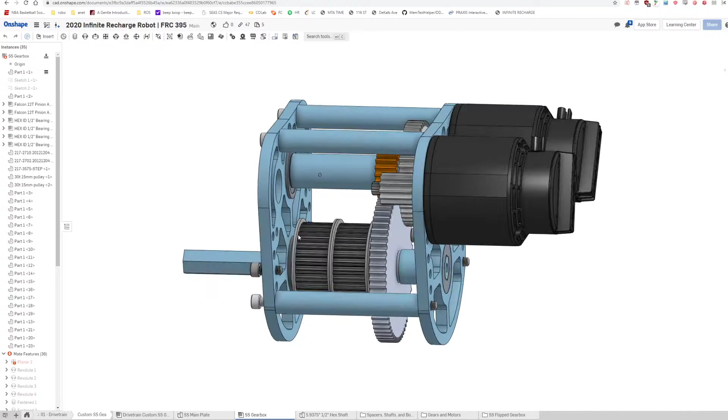Last night, and I woke up today and I sort of just banged out the rest of this CAD. I'm sure it's no surprise to you guys that it's much easier to work CAD without speaking to a microphone. But it is a lot easier.

Yeah, there's not much added. There are these plates, there are these spacers. I'm not really sure where I left off at, but I think it's a pretty logical progression.

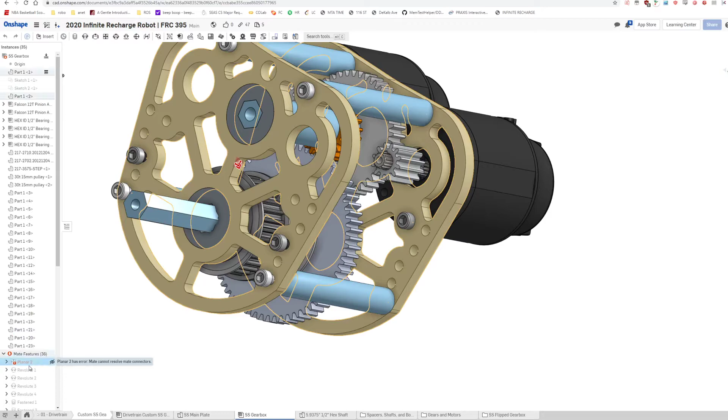These six holes are supposed to be threaded, and something I don't get... mate cannot resolve mate connectors. Weird, just noticed. The things throwing the errors are also...

Okay, well, I'll ignore the errors for now. Sorry, got sidetracked a little bit. So you should fix all that later.

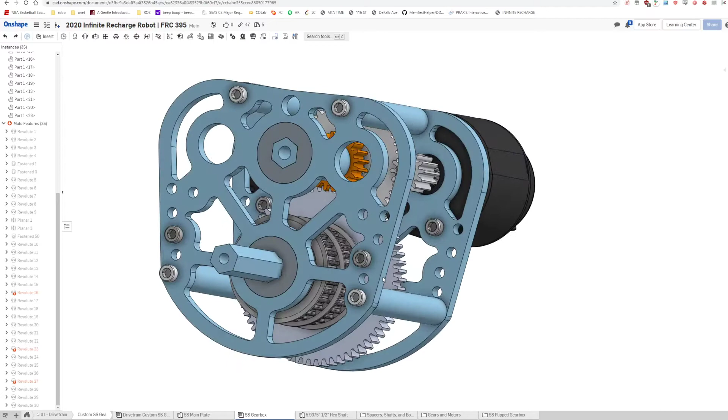But right now, the biggest changes are that I have added in these spacers, I've inserted the hex shafts, and there are appropriately dimensioned hex shaft spacers everywhere.

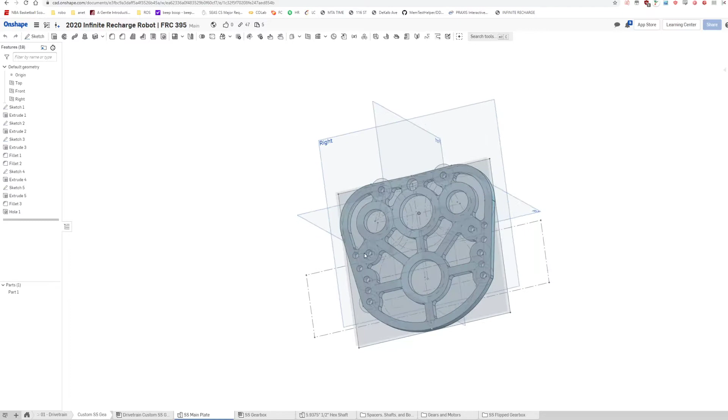That's mostly it. On the main plate, you'll see I tried to do this thing in OnShape where I tried to tap these 10 holes for a quarter-20. Maybe I did something wrong, but they do not show up as tapped.

But you can go back to the assembly and you can sort of see how I'm planning on this working, where one side isn't tapped, but it avoids using a nut on the back end. So these two holes aren't tapped, but these two are tapped.

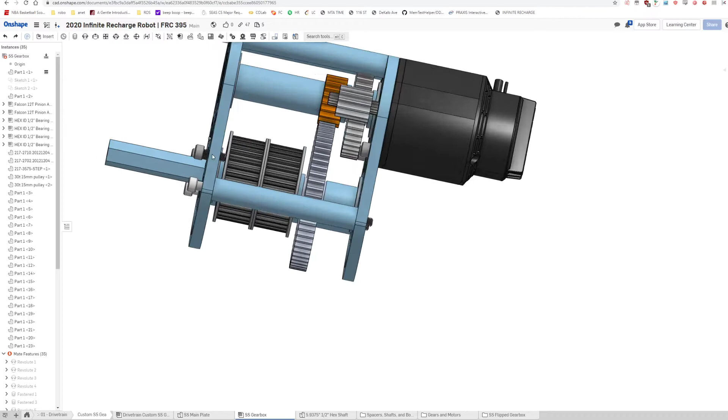So it screws into the tubing, straight into the plate here. These two, this hole and this hole, aren't tapped, and this hole and this hole are tapped. So it screws in like that. Motor holes aren't tapped obviously because of the pattern, and that's it.

It's six holes. I think it all makes sense. All works out. What else did I have to say?

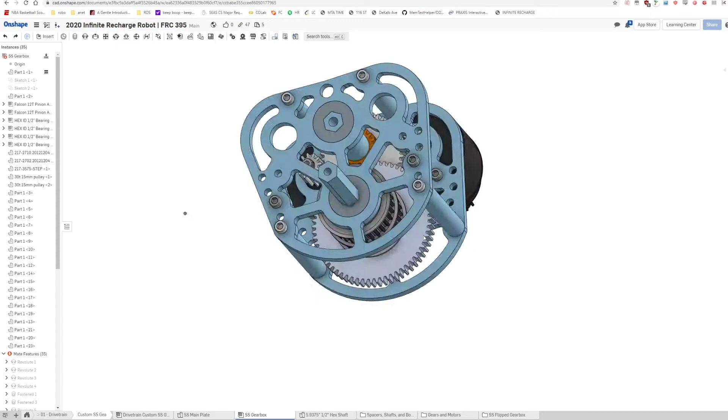So these two pulleys, I don't think this squishing is correct. I think there is more spacing between there, but it's as simple as just reducing the size of this spacer. There's still room for me to walk this way on this gear, so reducing the size of the spacer gives these pulleys more room to breathe.

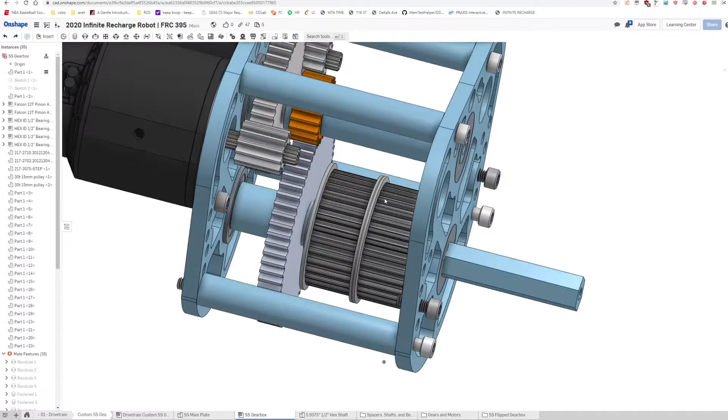That should be fine. Whether or not they should be smack together like that instead of having a 0.1 inch shim in between them, I don't know, but they seem to have been running fine on our drivetrain this year. Last year we didn't stack pulleys like that, but this year we've been stacking pulleys, and maybe the 4 or 5 hours of practice we've had has seemed to run fine.

Maybe it's been a source of issues, I don't know if it does turn out to be a source of issues. Again, we do have some room here to walk the gear back, and it's not a super big deal for the protrusion on this gear to be touching the protrusion on this pulley.

We could actually move this spacer out here. I think that's like the only... this is like the only... it was a very simple assembly, so to speak.

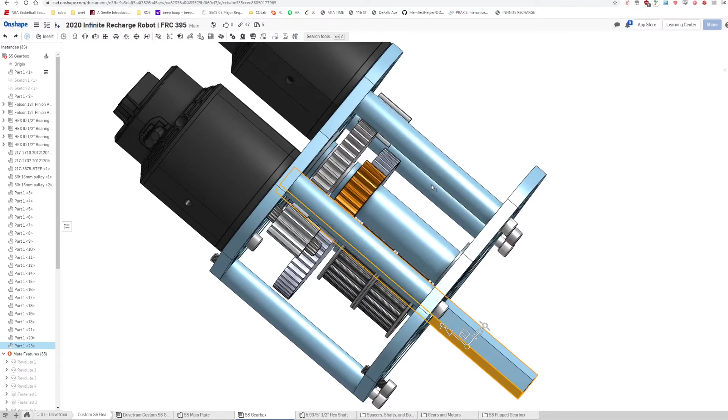Hex shafts, they're all the right size, I'm pretty sure. The nice thing is there's no need for collars or anything. It's pretty cool because if you just make spacers to the right lengths, you constrain the shaft in between the two flanges of the bearings.

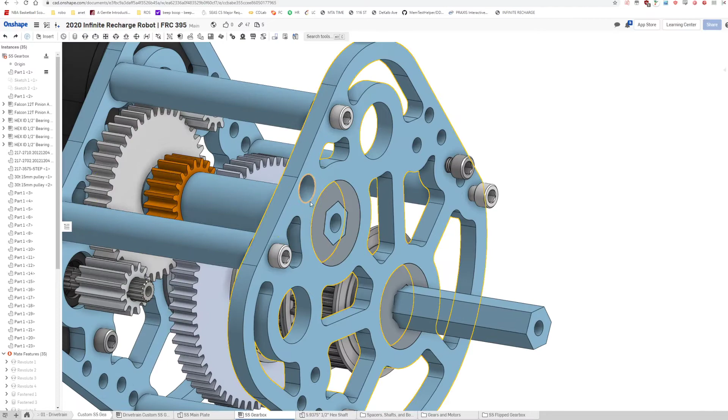Yeah, constrain the shaft. But you do still need to put like a bolt and a washer there, or like an E-clip. This is actually a problem, I think we might have to address that. I don't know how, because I don't know how you get a bolt and a washer there. Maybe I'll fix that off screen.

That's not tenable, you can't do that. Maybe what I'll do instead is reduce the size of the spacer, put in a collar, and that would restrain the shaft.

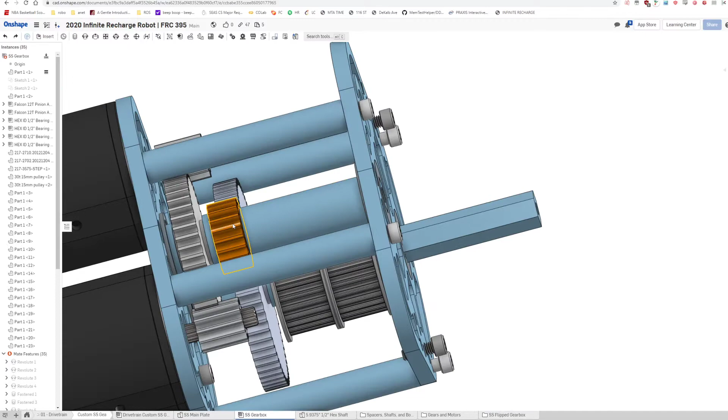I wouldn't put a clip here, I'd put a clip like here. That makes sense. Here it's not an issue, I can put a bolt and washer here, and a bolt and washer here.

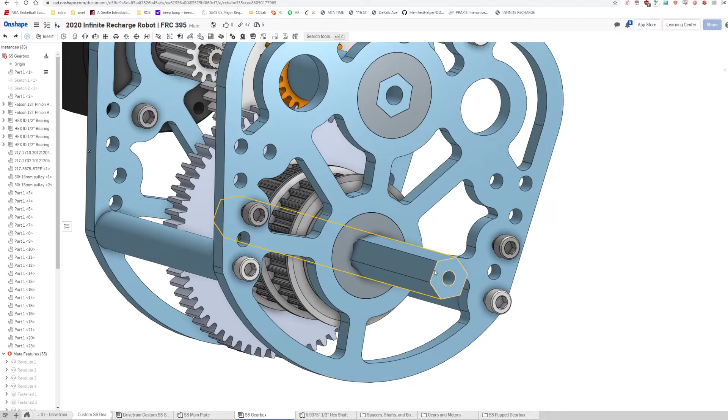It's kind of a trick I learned when I first started doing CAD. Constraining hex shaft is kind of a pain - Onshape seems pretty good, but in Inventor it's a pain. So it's really simple: even though we don't use Thunderhex, just extrude your hex shaft with a hole in it, and lining it with that center hole makes every constraint and mate really easy. So if you're using other CAD software trying to make hex shaft constraints work, try that.

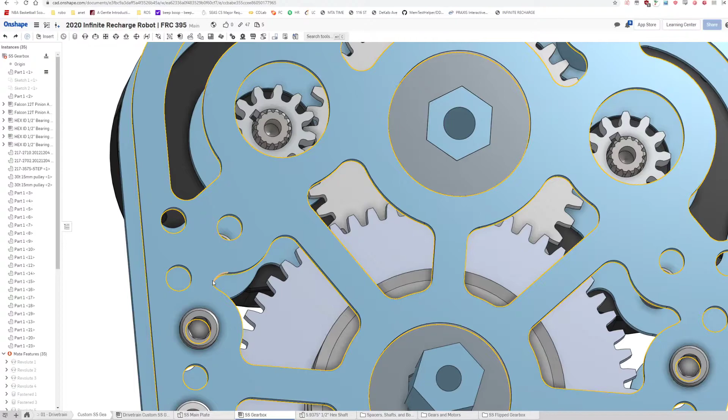This really bothers me, I want to just close that off like there. I think that's what's next for me, I'm gonna do that on this. This also bothers me to a smaller extent because an end mill can excavate this material, but it couldn't really do this - it cannot excavate this. I'm pretty sure a quarter-inch end mill cannot make that profile since it doesn't have an elliptical kind of orbit. But yeah, I'm gonna do that.

And then I think at this point we can go over to the main assembly.

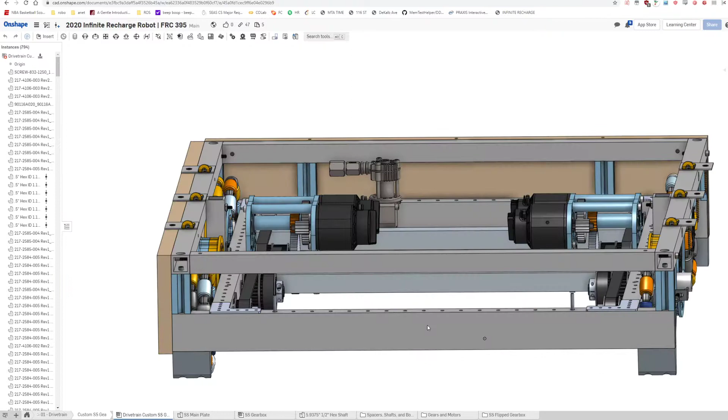I think a lot of you are probably wondering, like, this doesn't really look that space efficient. There's a ton of negative space here, a ton of negative space here. Have you really made any improvements, or have you just taken a step forward and two steps backwards? That's how I was feeling at first - it's like, man, all this work was for nothing.

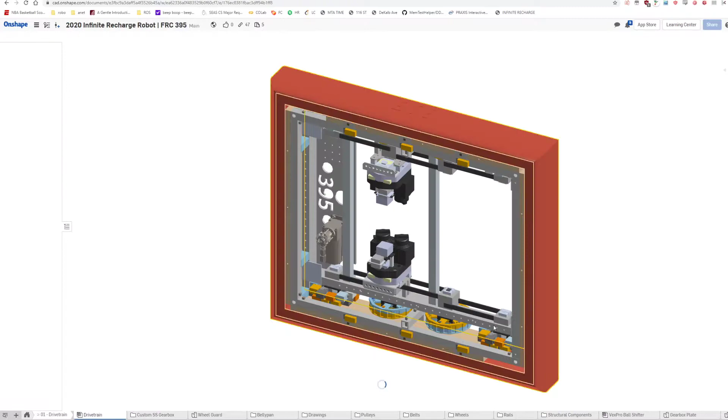But then looking at this gearbox in place compared to the old one - first, make a note of how much space is in between the gearboxes right now, and then let's look at the drivetrain as is. My point before was that these motors being up top means it's fine because all this space was being used up by the gearbox before, so it should make no difference. But look at the space comparison - it's pretty cramped in here.

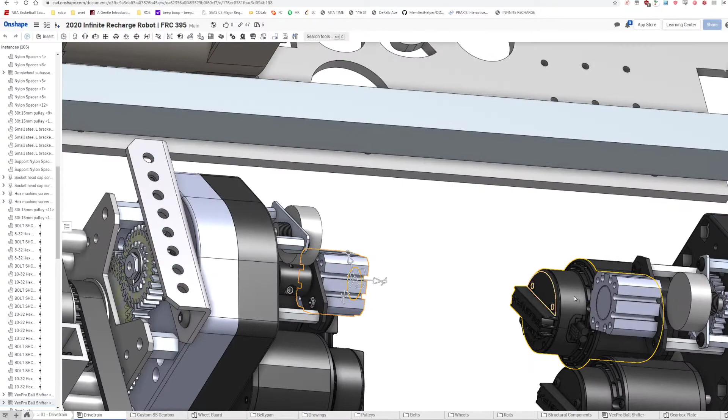Like we can measure this. So let's see from the edge of one talon to the edge of the other talon - there's like 5 inches. Yeah, 4.7 inches. And then from this pancake piston to the other pancake piston, maybe 7.2 inches, just about.

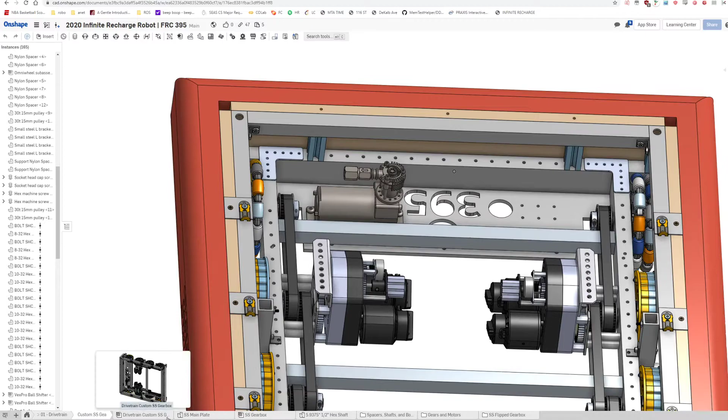So let's go measure this for the other gearbox. I don't know, it looks pretty solid to me - I feel like there's an immediate performance improvement in terms of space made available. So let's measure this - this is compared to 4.7, we have 7.2 inches. So there's a 2.5 inch increase in space here.

And if you remember, our whole climber assembly goes in between here. So the climber assembly wasn't going to touch the motors at any point, but now there's just more breathing space for every single mechanism lying underneath our superstructure, which is good - we want that.

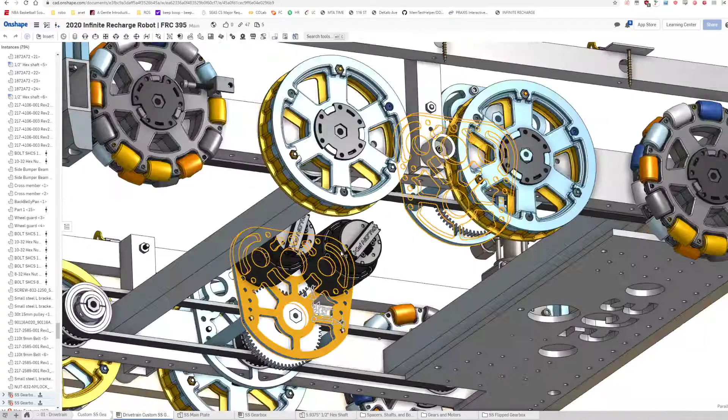And now this is compared to 7.2, and now it's 13.5 inches. So that's over 6 inches of space now in between the lower parts of the gearbox. This is actually good because now, excluding this gearbox, you can run a belly pan all the way through. It's kind of stupid because to accommodate these chonking gearboxes we had to make 2 component belly pans, but you could have just extended it out all the way with a gap here.

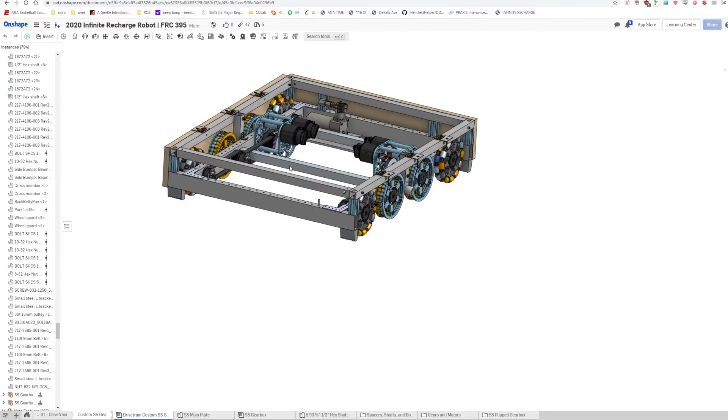So honestly I'm not even sure how viable it is, because there's still going to be a big cutout this way - maybe even then a belly pan wouldn't be the smartest idea. Even looking at it, I'm not super satisfied because again there's a ton of space used up here that's not really needed, and all this negative space means that putting this together is going to be like a dream.

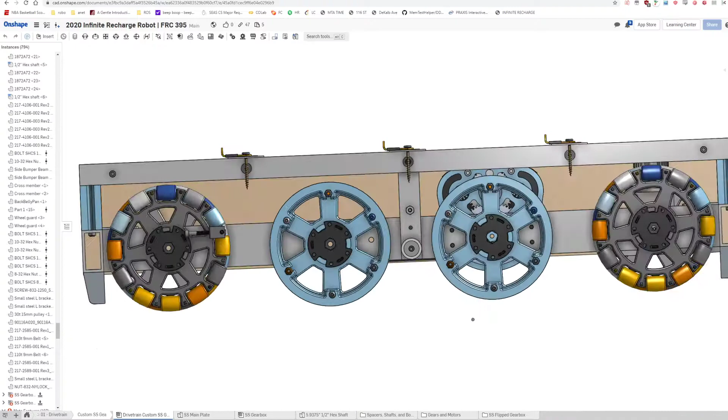These bolts are super accessible, and then if you rotate the wheel a little bit, it's kind of easy to get to - the hole is accessible through this. So you rotate this wheel a little bit, and then you can get right into this other motor gearbox. You actually, without even taking off the wheel, can take off the motor now, which is really accessible.

And that's a sacrifice we make, putting in more space and less weight in the gearbox. But now these motors are accessible through where we see, so there's no need to take off the gearbox and ruin the Loctite - they're just in place, you can just loosen and tighten.

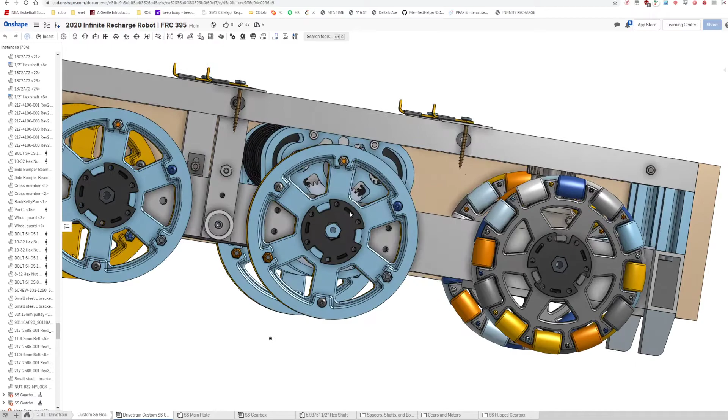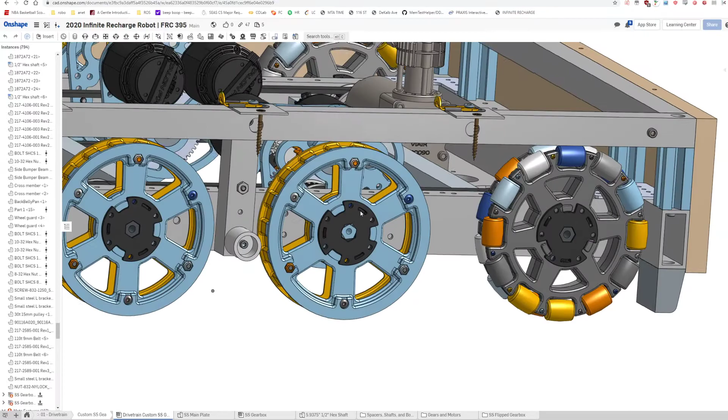With these wheels, these bolts are really easy to take apart. I think we switched to the AndyMark Performance wheels, the aluminum extrusion wheels - I think they also have the same 6-spoke pattern that makes these holes accessible, so that's really good because now you can take off the entire gearbox without ever having to take off the wheel, which is pretty cool.

Pretty cool, so the shaft is properly dimensioned. I'm happy about that. I think, besides, we came in here with 2 demands.

That it was more accessible and more serviceable, and also that it didn't loosen up all the time. We addressed the accessibility, I'm really happy with that. And sort of the next big thing is

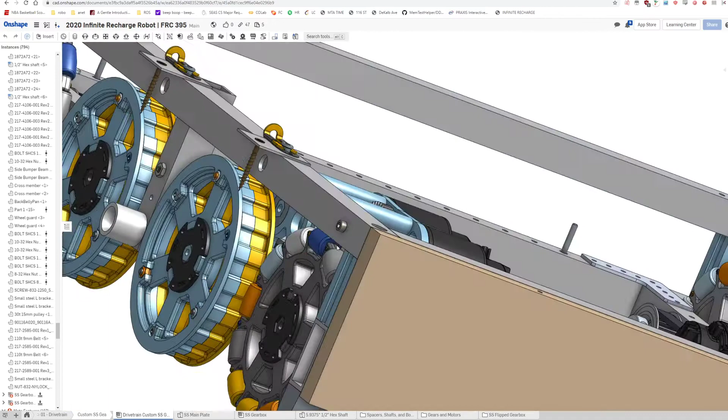the vibrations. And I think if this huge plate attached to the side of this tubing, and probably 4 bolts going in this way, it's definitely going to be much more held in. And just by nature, there's less of a vibration. There's less of a

gearbox to even vibrate up and down. There's less gearbox, and it weighs less, so it's not going to exert as much of a lever force on the bolts holding them in.

Plus, there are a few more things going for us here. The bolt going in from the tubing goes all the way through the other end of the gearbox plate, so it holds everything together. We see that in 2 places, and then you have 2 bolts that just connect the plate to the tubing.

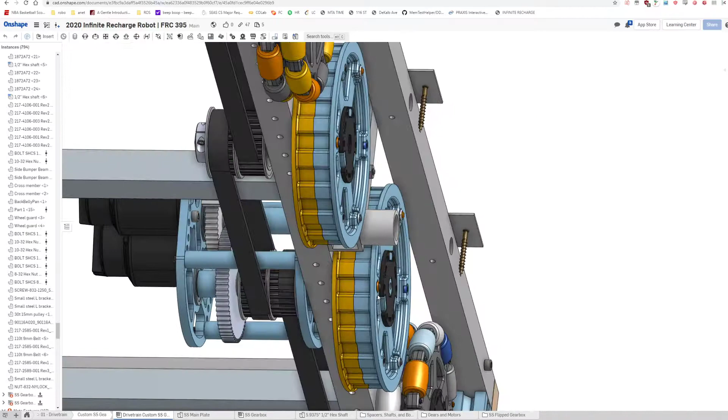I think that is pretty solid. You put some Loctite in there, and then you call it a day. But there are other ways to increase this

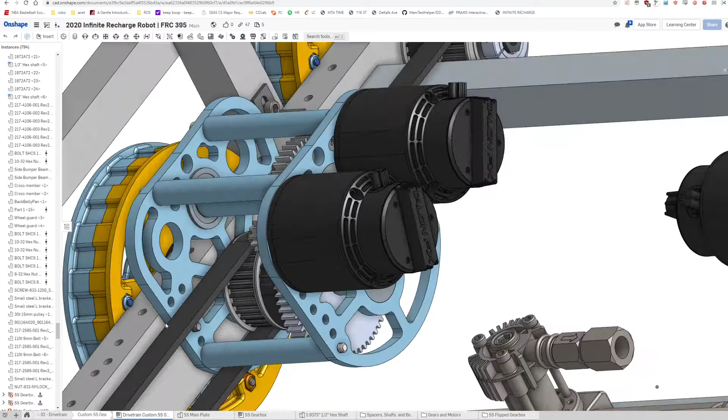rigidity. Like, I think in the real drivetrain, these wheels are spaced out more because otherwise these nuts would collide with the tubing. So I'm pretty sure these are spaced out, actually a pretty fair amount.

And because we're using the AndyMark performance wheels, there's actually a taper going in from the external rim down to the center bore. So there's space for a bolt head peeking out of here. So what we could do is

put in a spacer to connect between the walls of the tubing, and then you put the bolt through that as well. So that way you get longer bolts, and then you really increase the rigidity of the gearbox because you're constraining between this plate, spacer, the plate, this wall of the tubing, a spacer, and another wall of the tubing.

So very rigid. That's not in effect, but that is a change that we could make to make it even more rigid if we continue to see the vibration happening.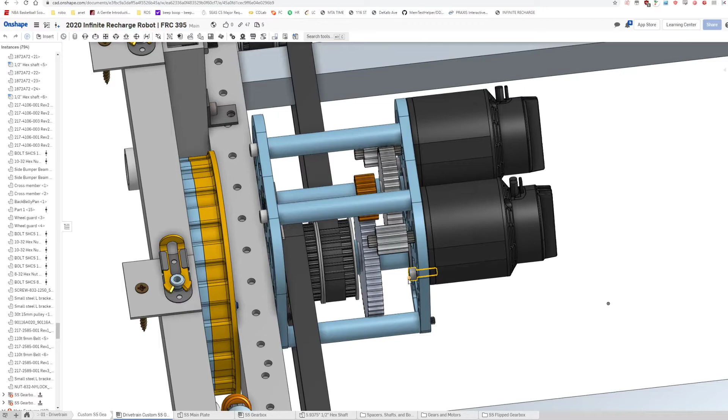What else is there? There's not really much else. I think if it turned out that maybe this gearbox was, for a reason, not rigid enough, there are a few places we could put holes.

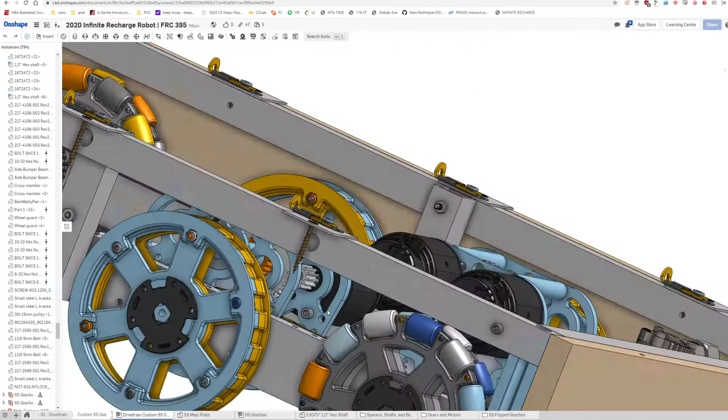I would say, number one being there's a hole here that you can line onto and connect the gearbox to the tubing. If it's not rigid here, there's a hole here to connect the tubing.

So yeah, and it doesn't quite clear the tubing here. You can't really fit a bolt in there. It's my bad, but

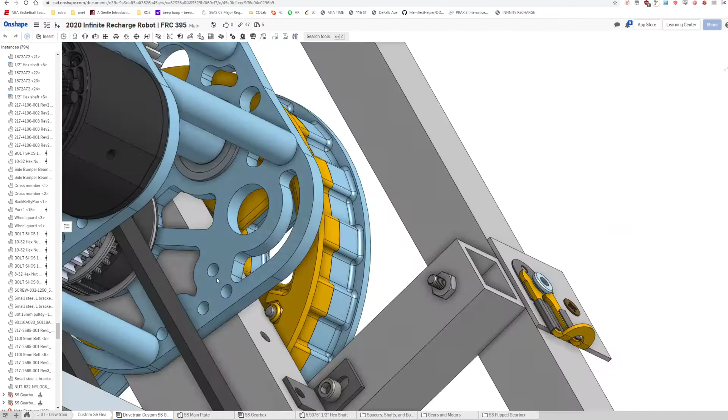you can put a set screw in there. Actually, you could put a set screw in here, and a spacer cap at the ends, hold the gearbox like that, and that wouldn't really be doing anything. It would just be at that point like a spaced out member. It wouldn't be really doing much for structural rigidity, but it would just be hanging out in there.

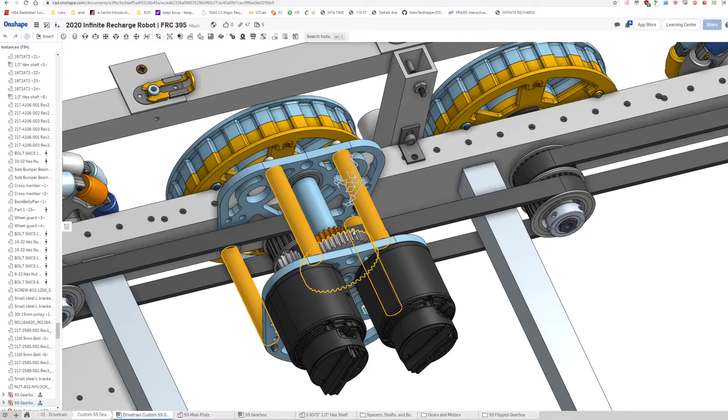So I think we're kind of committed to these four mounting points as your go-tos. This is how the gearbox is held together, and it's not like if this is bad, it's not gonna work. These 4 points are structurally integral to the gearbox, and if they turn out to not be good enough, then we're kind of SOL.

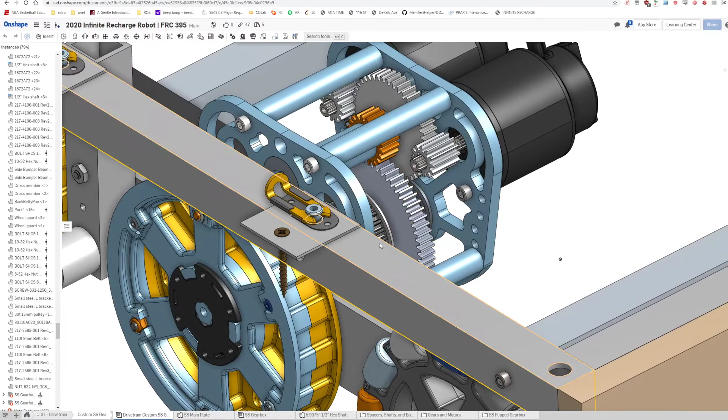And if that happens to be the case, then that sucks. There aren't really other more convenient places, and that's okay. We can make holes work, we can redesign to have a hole here, put a spacer across like that, but there aren't for now. And I think we'll be fine.

I mean, this is still all like a theoretical thing. I'm speaking as if this is a real thing, but it's not. Speaking more, I know that

the belts do not look right. That's because they are probably like so. Probably my finest achievement is

figuring out how to get perfect looking belts on pulleys, and I showed the twins how to do that as well.

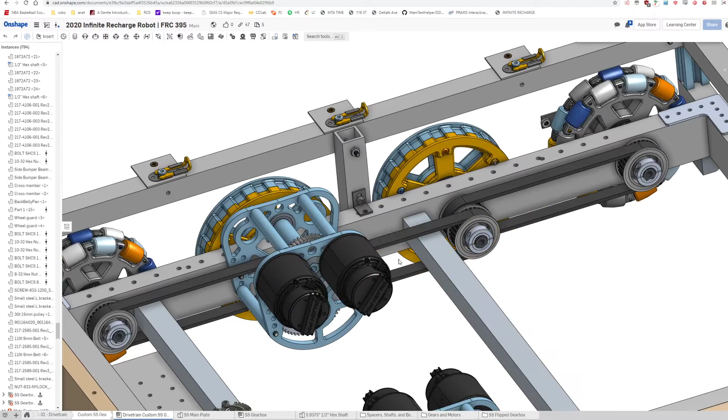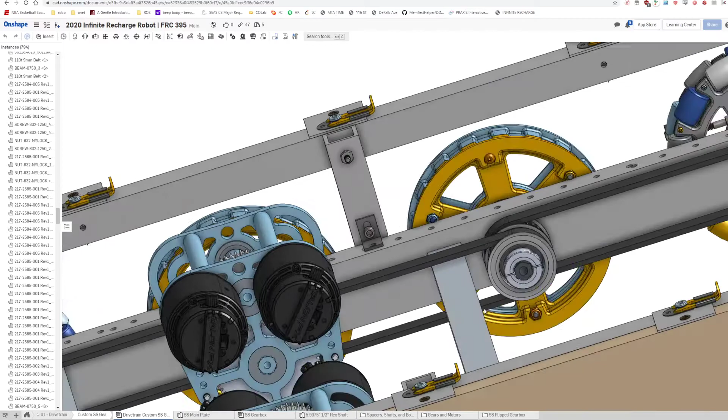But rest assured, the distances are correct. These belts are super nominal. They're not really representative of real life, even though they kind of do look like they're in real life. You can kind of see the center drop, right?

Can you really see the center drop? No, you can't really see the center drop. But there is a center drop, and I think that's what's causing a lot of the weird looking issues.

Probably the next thing to note is that we see how the belts clip the pulley. It just means that we need to remake these shafts so that everything gets spaced out, like a quarter of an inch plate.

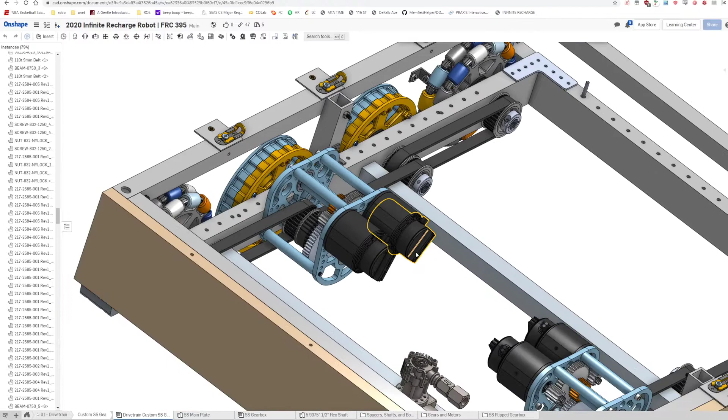Yeah, so not too many changes needed. I am worried about the true drop-in nature of this. A robot isn't symmetrical. Its center of mass is pretty centered, but it's got different things in different places. There's no left-right symmetry, and there's definitely no front-back symmetry.

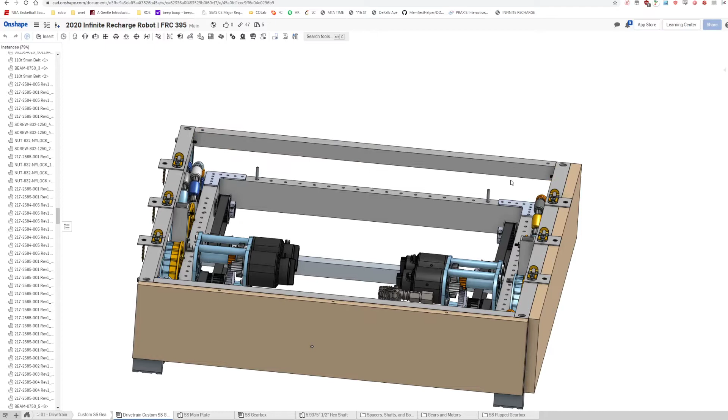So on the left side, this is the robot's left side, we're totally fine, this is like a true drop in. But on the right side, I'm pretty worried, because what's going on this right side is there's a cable run on a 1/8 inch thick, 1 inch wide strip of aluminum going from around here all the way to the back of the robot. So because our robot...

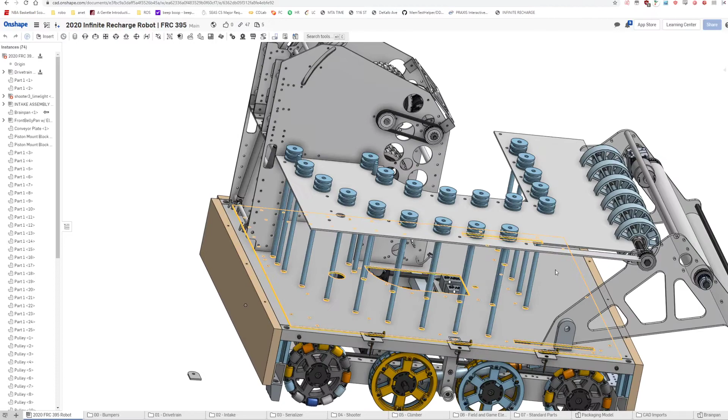It's not visible here, but this entire... I can't do it. All right, well, this entire robot hinges up.

It goes up, and if you're going to wire your shooter or wire the serializer, you have to be able to have cables that extend all the way up. Either they are on an IGUS chain or whatever, or they come out from the back into all the other motors. The reason you want them coming out from the back is so that when they hinge up, you don't need to increase travel length or anything. They just rotate, pivot, however.

So what we have is a giant bundle of cables coming out from this back corner, going out to our serializer motor here, our intake going all the way over here, and the three motors on our shooter. One, two, three.

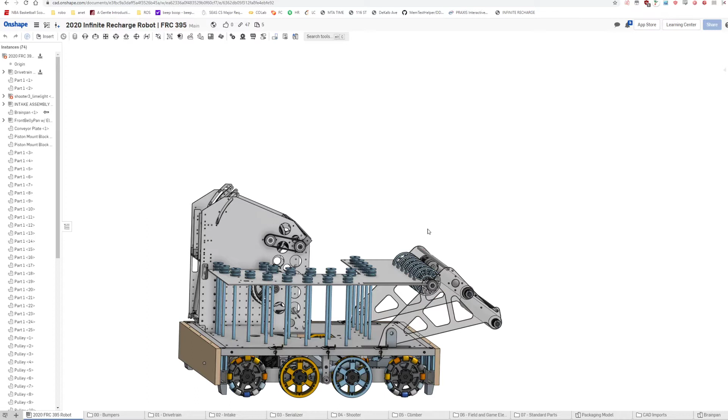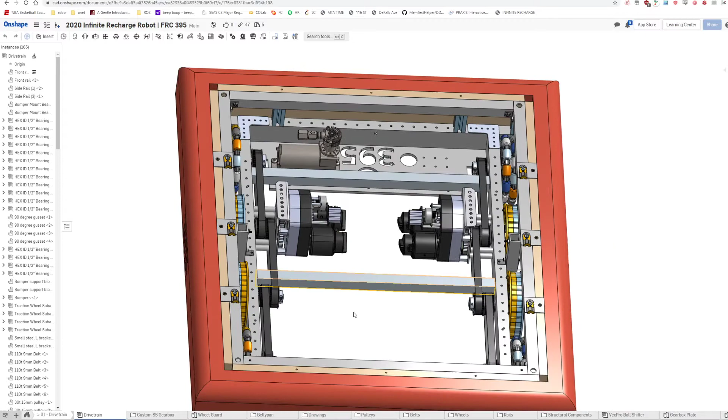So there's a huge cable run going all the way over here, but we go back to the drivetrain. That cable run is connected to, again not visible here, but our entire belly pan PDP Roborio system over here.

God, it's kind of frustrating. Where did they put this? Okay, here it is. So completely blocked out to me, but there's a PDP here, battery, Roborio, and VRM and PCM. Yeah, okay, that looks right.

So we've got to run wire from here along the underside of the robot and through this open slot to everywhere on the robot. So there's bottom side, top side, and running power in between the bottom side and top side becomes pretty difficult. It was our biggest challenge in week 9.

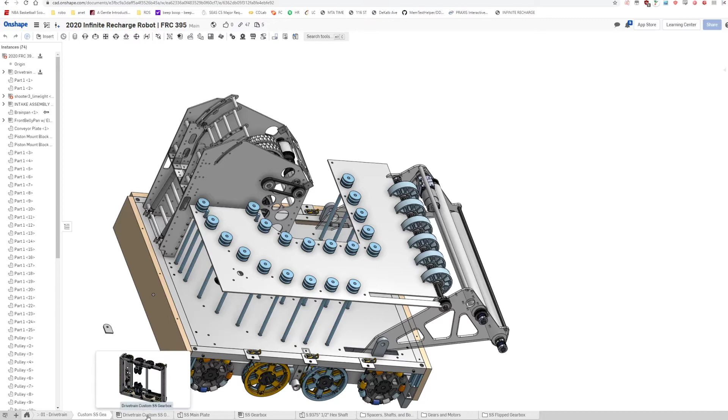Thinking about it, we're very lucky that we had a week 9 to be working on this, because God, we were so behind schedule. So going back to the custom gearbox, back on the right side, there's a cable run going from here to here and through this back hole.

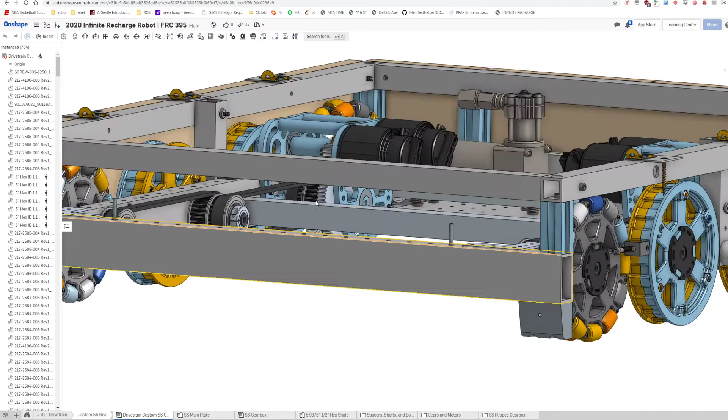So, if I can show you, there's... okay. This is not true. What? It's ever so slightly tilted. Okay. All right, whatever. Either way, I'm pretty sure this is... yeah, this is, I don't have an 1/8 inch of clearance between the top and the bottom of this 1x1 tubing and this gearbox plate.

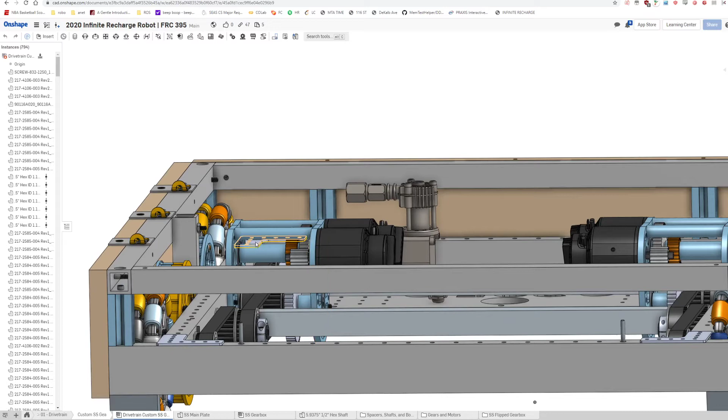And there's an 1/8 inch plate coming from here to here, on which all our cables are routed. And what does that mean? I think that means if we switch this gearbox spacer to 3/8 of an inch, that plate would actually then fit.

Also, it's a thin enough plate where if we just bent it over this spacer, that would work. But no, we're not gonna do that. Let's just replace these spacers with 3/8 inch spacers, and that plate suddenly fits.

The reason why I'm worried that might not work is because, if I recall, on that one cable guide plate, there's a bunch of stuff on the top and the bottom of that plate, so I feel like it's gonna get in the way of these spacers, and that's not good.

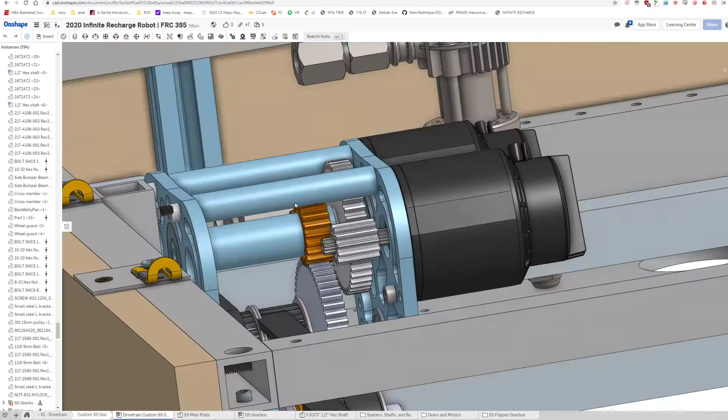So even though if you replace these spacers with smaller spacers, it would be much closer to a true drop-in replacement, I think there's still unforeseen things.

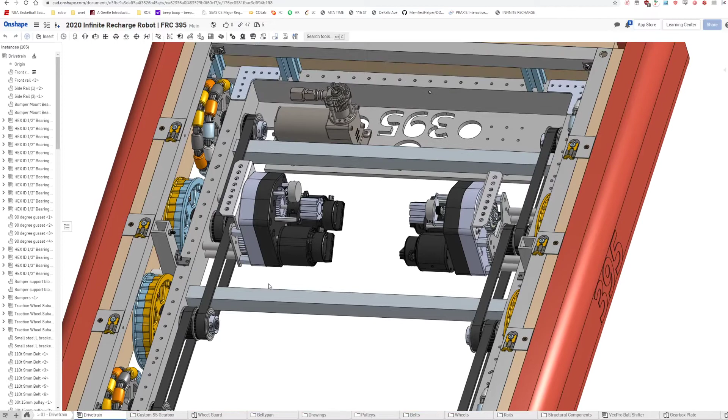Like on 2Train we don't CAD everything in the robot and then manufacture it. A lot of things come from across, mostly from Bob's drawing board lab, and my work in Inventor, and the twins' work on the drivetrain and the intake. It sort of all gets put together, and only now, right before our season got cut short early, are we starting to put it all together in Onshape.

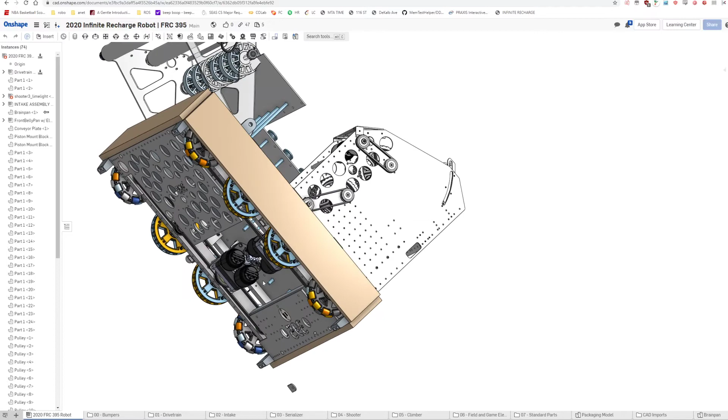So a lot of things aren't really fully modeled in here, which is bad because then we can't figure everything out, but it's just a byproduct of how the team works. We don't have a universal CAD system, and having one would be good, but there are certain workflows set up that allow Bob to work faster and me to work most efficiently, or this is what the twins started working with. Everyone's comfortable with what they're working in, and we sort of make it work. And Popper's not a bad robot.

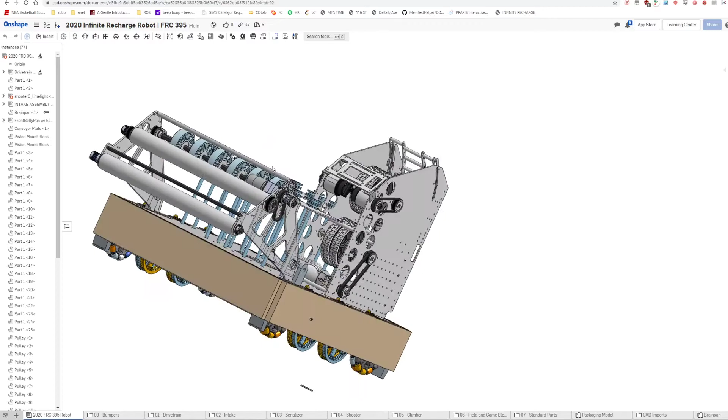It definitely came together really well. I think sometimes how it came together is that we allotted space for every mechanism, like on paper and pen, in our minds, and in all our conference talks. We planned out how this robot had to work, and every designer took what they knew and made their designs work in the space they were allotted. If you adhere to that rule strictly, but you don't adhere to the same CAD rule strictly, you still end up with a very good robot product.

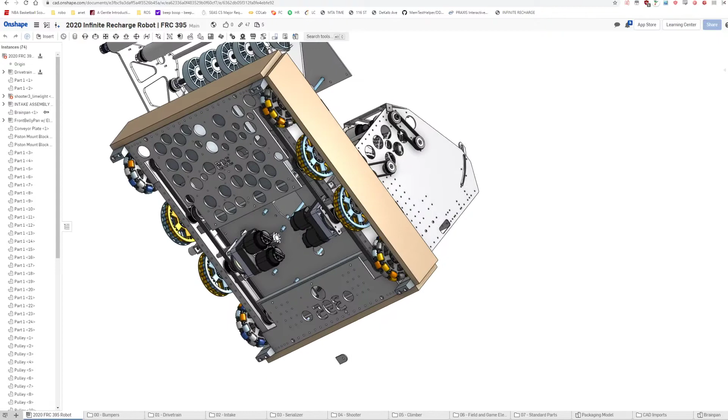So I'm not mad about it, but now the true strength of CAD comes in with modularity and being able to take out a part and know exactly everything around it, so you know what it's going to hit. Right now I'm just working off memory, because it's only been maybe 2 weeks since I last worked with the robot, so I know what everything kind of looks like. But if you ask me a month or 2 months from now if I could tell you where everything is on the robot, I couldn't tell you.

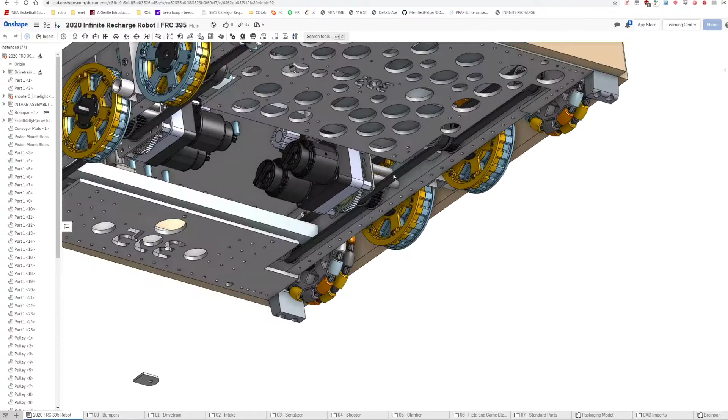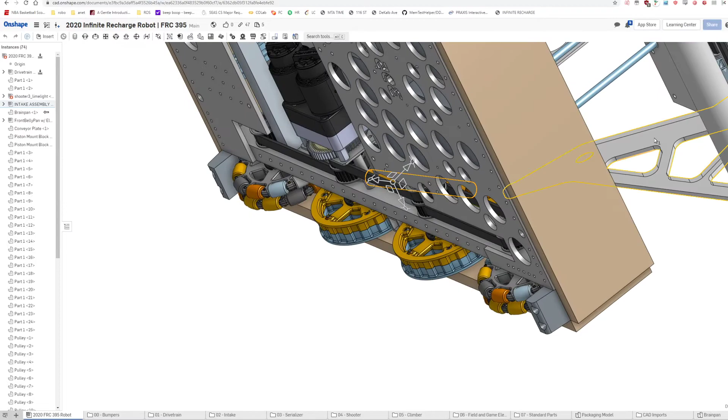You can kind of see here how our piston is mounted over here, kind of hidden, but which actuates our whole intake up and down. I'm not a fan of this intake piston mounting either. It looks really cool to not see a piston here and still watch it go up and down, and that's super cool. But we sheared off the entire triangle portion here on this slot. You kept slamming into this. I think we needed a more mechanically advantageous place to mount the pistons, like above ground to this higher point.

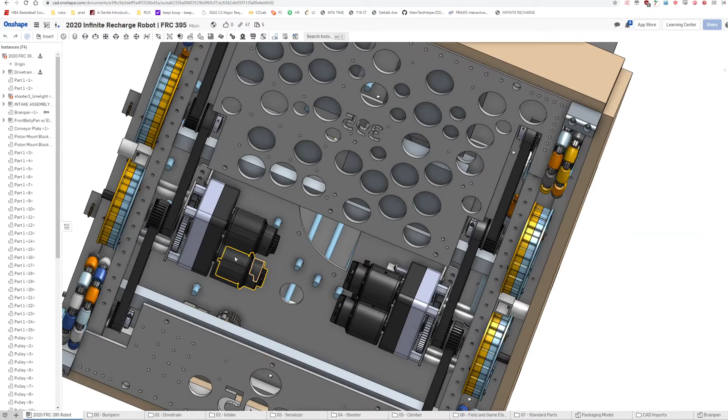But we've made it work. We've added foam padding, thickened up this triangular portion, and extended out this. Not a problem. So this piston, as modeled, looks like it gets in the way, but it doesn't. It actually runs—I think. Oh geez, maybe it does run. Oh damn, no it does not, because it's like way shifted out over there.

So I think the piston runs directly over this 1-inch channel, 1-inch tubing. Yeah, I buy that—it runs over this 1-inch tubing. Plus, it's kind of above the gearbox.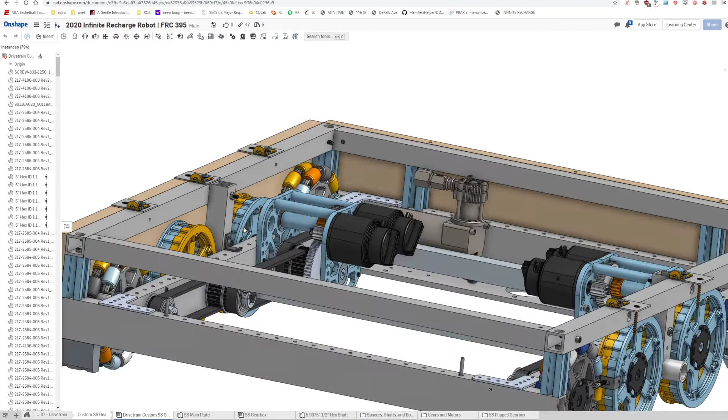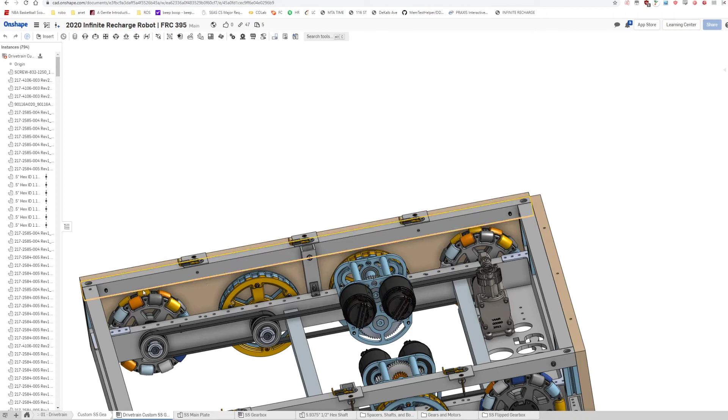If you look here, it's mounted up around here above the gearbox, and we can kind of see that it's close. I'm not gonna say we're for sure clear of it, but the piston mounts around here, floating above this gearbox, and it pivots right next to it. At the lowest point, I think we're pretty clear. It mostly dips down close to this diagonal line where the piston is resting, and then it extends up to be resting flat. So I don't think you have to worry about it clipping the gearbox plate—it's going to be above the gearbox plate for most of its time.

But yeah, it's a pretty close call, and unfortunately there's no CAD model to look at—no fully modeled and constrained piston for me to see if this collides. Again, that's just a product of how the team works. Nothing that can be changed at my home sitting in front of my computer.

We're mostly done. I'm going to do one final thing: measure the weight of everything.

I've given weights to everything, like things that are aluminum 6061 and things that are aluminum 7075. We come out to a final of 3.43 pounds.

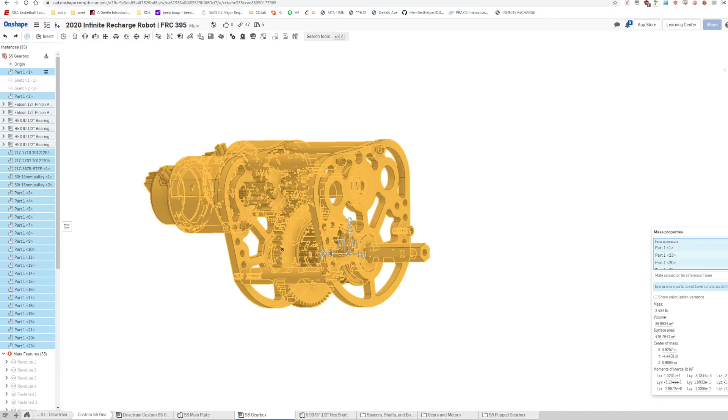That was the weight of the whole gearbox before I took anything out. That 3.43 pounds was about the weight of the gearbox without any bolts, spacers, or shafts, with the plate unlightened. After lightening out the holes and re-adding and putting in all the shafts and everything, the bolts, we've come out to around the same weight.

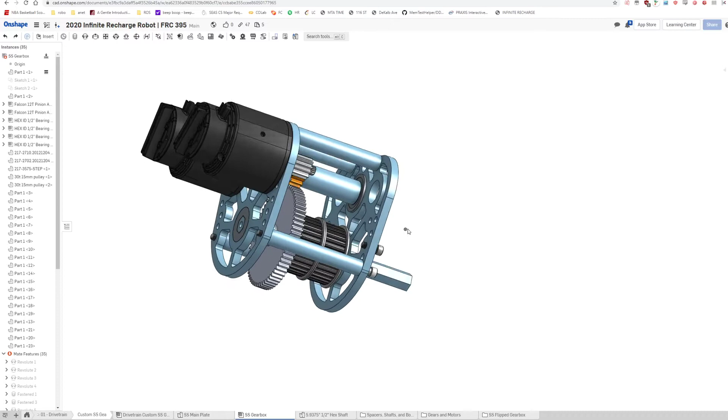So 3.5 pounds, I'd say - 7 pounds in total for 2 gearboxes, compared to 9 pounds for the 2 ball shifters. And the ball shifters, because we added so much extra stuff on top, probably came out to close to 9.5, maybe 10 pounds.

So I think in total we saved at least 2 pounds, really 3 pounds across the board. And more than saving 3 pounds, I think we've saved a lot of space in between the gearboxes.

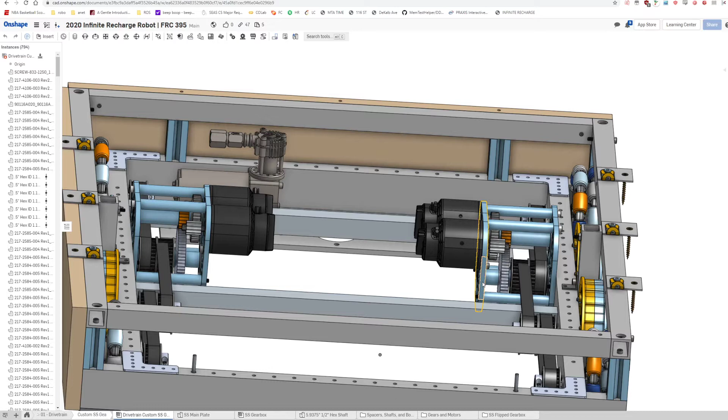The biggest fix is that it's more structurally rigid and it's worlds easier - incredibly easy to service now. I think that's something we should be proud of, because it was really hard to work with them before.

I have no idea if we're ever going to make this plate, but I filmed this 6-part video series to show how to do this, and at every single step enforce the same design reasoning, and help you guys understand that this plate is something we could really easily machine.

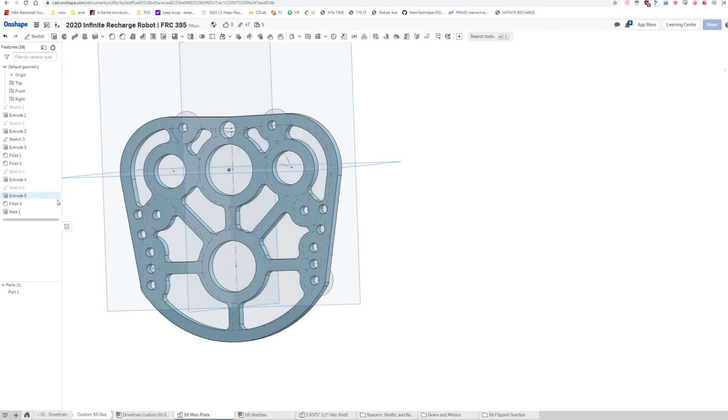We operate out of a fully tooled machine shop, and making a small plate like this, you upload the drawing of it, and you tell your machine, hey, generate G-code for this, and then do it. We're very privileged and very lucky to have that.

I think in 2Train's history, we've definitely kind of avoided these complex plate designs and relied on AndyMark kitbot chassis gearboxes or ball shifters. But designing a plate like this and figuring out and constraining all the motors isn't a Herculean task. I'm not going to say I'm very good at it.

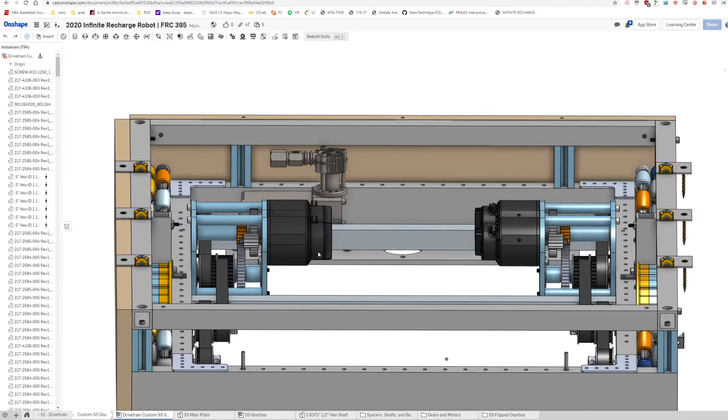This is actually the first custom West Coast Drive gearbox I've ever designed. But just working off your knowledge of how motors mount, how gear ratios work, center distances, and general manufacturing know-how for FRC, you can design a nice looking gearbox really quickly.

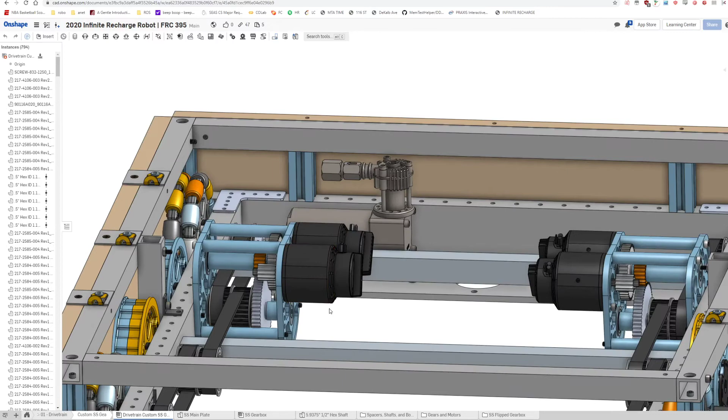So I guess the point is that with some effort, some thinking, and some research, you can design a really big improvement to our robot without needing to be with the robot or having tools on hand. That's the power of CAD.

And it speaks to how much this coronavirus sucks - I'm doing this and not working on the robot. But it's allowed for this opportunity.

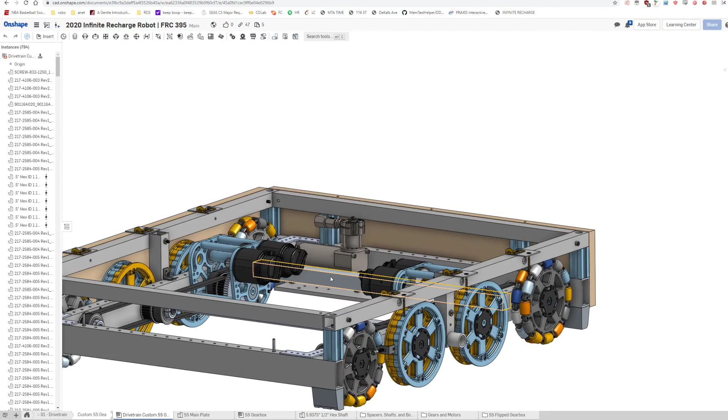In summary, the main changes were rigidity to reduce vibration and gearbox loosening, as well as motor accessibility. We've done both of those things - the motors are completely accessible, able to be loosened from just looking at the drivetrain externally without needing to move any wheels.

By adding a whole plate for surface area contact instead of just 4 long spacers, we have this whole plate that screws onto the gearbox and then to the tubing. We've generated a lot more rigidity in the whole structure. So those are our 2 main objectives, and I think we have achieved them.

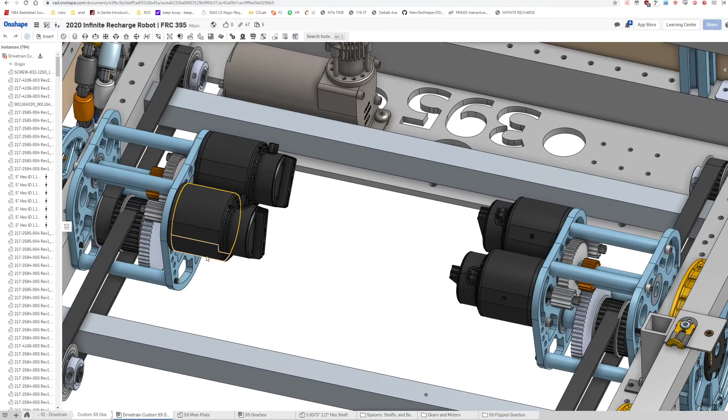Weight savings wasn't a super big consideration here, but we did ultimately end up saving a lot of weight. If you wanted to save even more weight, we could chop down this other half that's not being used, and save some more weight.

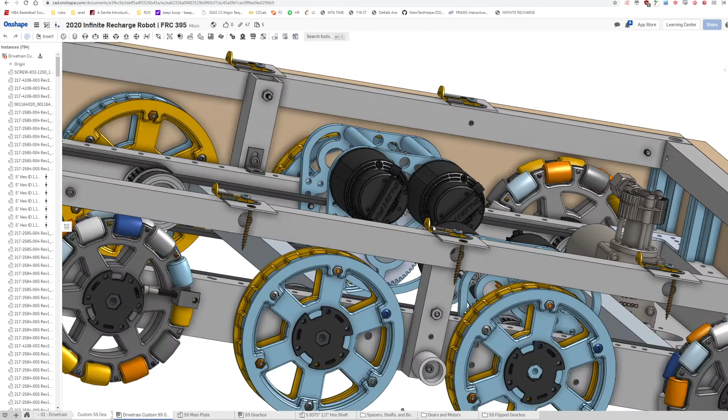These 2 gearboxes weigh 7 pounds compared to our old gearboxes, which weigh in total 9.5, almost 10 pounds. There's significant weight savings and significant packaging space saved.

Before there was 4.2 inches between the motors, now there's 7. Here there used to be 7 inches, now there are 13 inches in between. So basically a bunch of weight, space, and time saved with these plates.